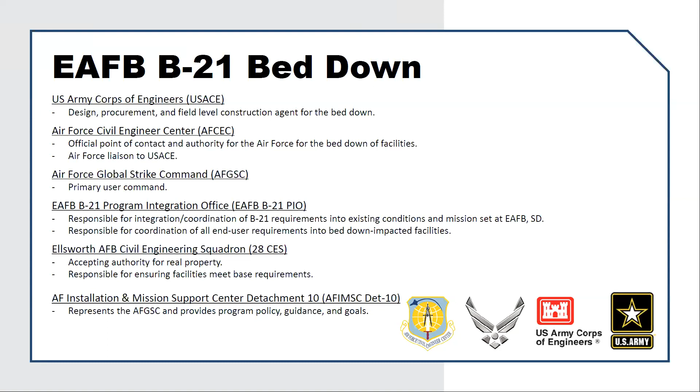We have Ellsworth Air Force Base Civil Engineering Squadron, who will be accepting the facilities and responsible for ensuring operations and maintenance facilities meet the operational needs. And then we also have Air Force Installation and Mission Support Center, DET 10, and they liaison between Global Strike and AFCEC and provide policy, guidance, and goals for the bed down.

I was asked to build on what the Army Corps of Engineers' role is, maybe answer the question why a bunch of people with Army behind their name are involved with the Air Force bed down. Ultimately, we are the design and construction agent for the Air Force for the bed down, and we're involved through the entire delivery of these projects, from planning through design and construction. We provide, on the government side, some continuity through all of those phases of project delivery.

We issue, negotiate, and award design contracts or task orders. In this case, a lot of these are going to be issued through existing indefinite delivery contracts. We'll talk about those a little bit more later. We typically award those to a prime AE that may utilize subcontractors. Similarly, on construction contracts, we award construction contracts to prime contractors only, and then those contractors may utilize subs.

Jason's with Walsh will be talking here in a few minutes. He'll probably dive in a little bit on what those needs are, but our focus is usually interacting with prime contractors. We have several offices within our district that are involved with the bed down. I sit in Omaha at our headquarters building. We have an area office, the Black Hills area office, which is in downtown Rapid City, and then we have a resident, local office at Ellsworth.

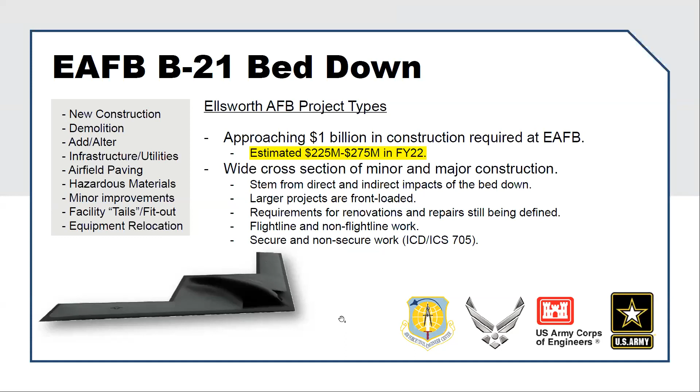So the larger projects in the bed down are front-loaded, with some of the O&M type and repair type projects trailing in the bed down. Last year, I think we were pretty vague on the bulk of the bed down occurring in the North Ramp area of Ellsworth Air Force Base.

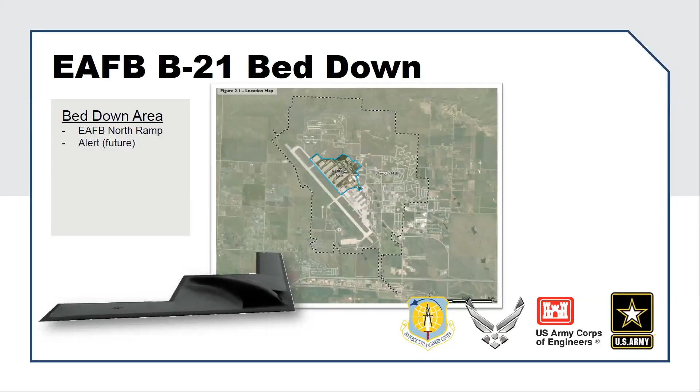That's kind of highlighted on this slide here. I'm not sure that we presented this, but this is a map of a good chunk of the projects that we're currently tracking. This is all obviously subject to change, but the facilities highlighted in yellow there are either a combination of new or renovated facilities that we're tracking.

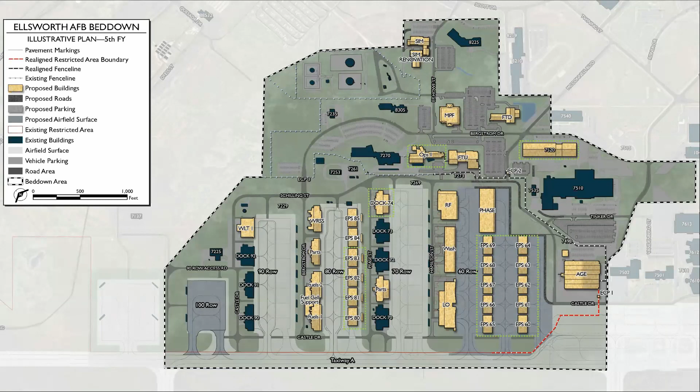So as far as unique features and common threads for design of these facilities, almost all of them are utilizing a design bid build delivery method. A lot of that's focused on the fact that we're designing facilities for a weapon system that's currently under development. There are also a lot of secure features associated with these facilities. And obviously, with it being a new aircraft bed down, there's airfield paving in the mix, along with utilities, infrastructure, and other types of work that we're targeting to deliver through the bed down.

As far as procurement goes, and this is mostly focused on construction contracts, we start as early as we possibly can to engage with industry on the best and most efficient ways to procure these projects. So about a year out from actually advertising a project, we'll begin a market research phase.

This has become a little bit repetitive, but ultimately we post all kinds of information on sam.gov regarding individual projects, so definitely keep tabs on that website. Typically a search with B-21 is a good start to see what's going on.

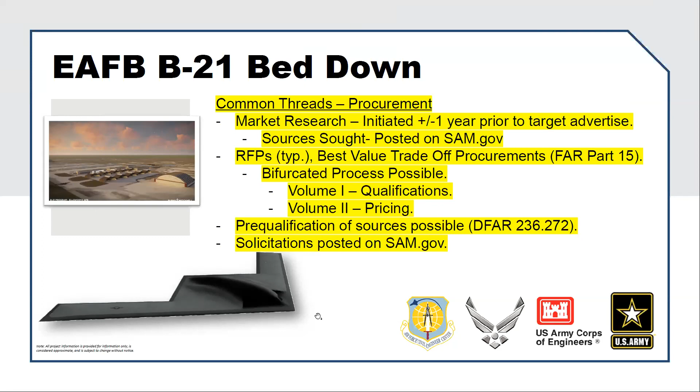And again, solicitations are always, or almost always, posted on sam.gov.

We have quite an array of projects under various stages of planning, design, and now starting into construction. Right now, we have FY22 through 24 projects under design, and we have 24 and 25 projects entering planning.

Last year we talked about various AE IDIQs that we're tracking. Ultimately, those have been awarded since then, so here's a list of the prime AEs on those IDIQs. Most of our B-21 work is targeting that B-21 IDIQ coming out of Kansas City District, but ultimately we tend to use all the tools we have at our disposal to deliver on the requirements for this bed down.

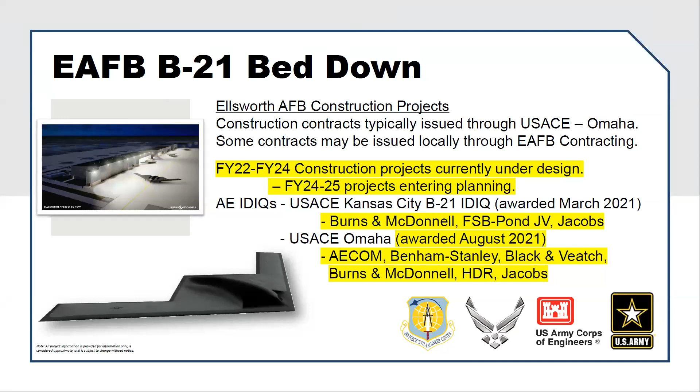Jason with Walsh is going to talk about the LO hangar, but that was our first major award for the Ellsworth bed down. It occurred in mid-September last year, so I'm not really going to dive in on that - I'll let him speak to that project.

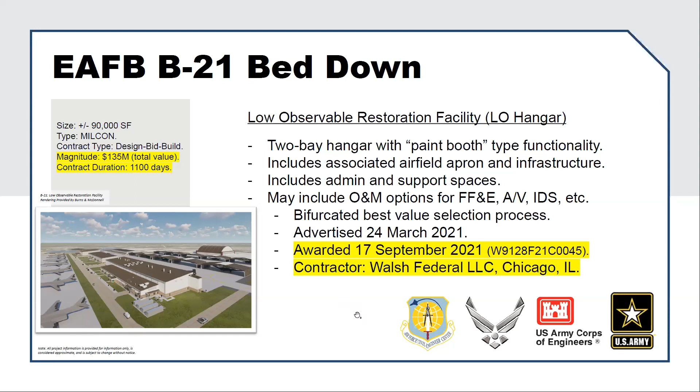It's a two-bay hangar facility. We also have several FY22 large MILCON projects that are advertised for pricing right now, and pricing is due very, very soon on a lot of these. I'm going to quickly gloss through some of these, but I've tried to provide updated information, contract and advertisement numbers where I can.

We have a wash rack and maintenance hangar, a two-bay hangar that actually sits right next to the LO hangar. We have a mission operations planning facility with a lot of security requirements attached to that. Pricing on this one is currently due in late January.

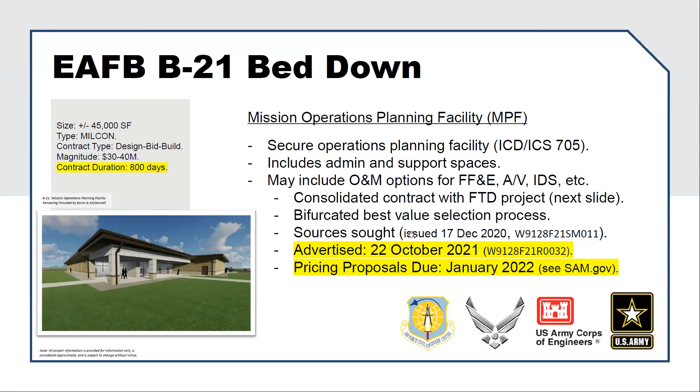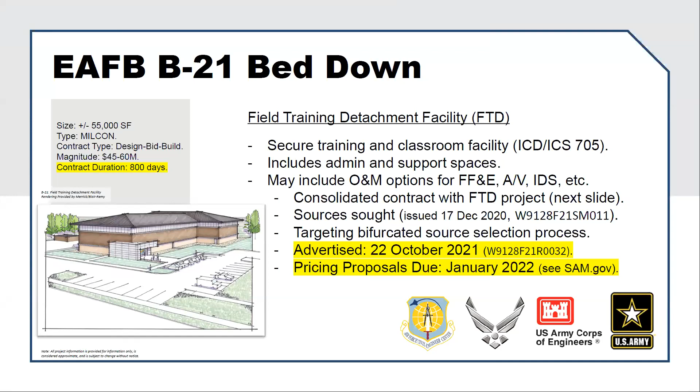We have a field training detachment facility that was initially advertised in October - I have a note here I actually didn't highlight, I should have - this is consolidated with the MPF facility in a single procurement. They sit on a shared site with very tight site constraints, so we've issued these two projects as a combined RFP.

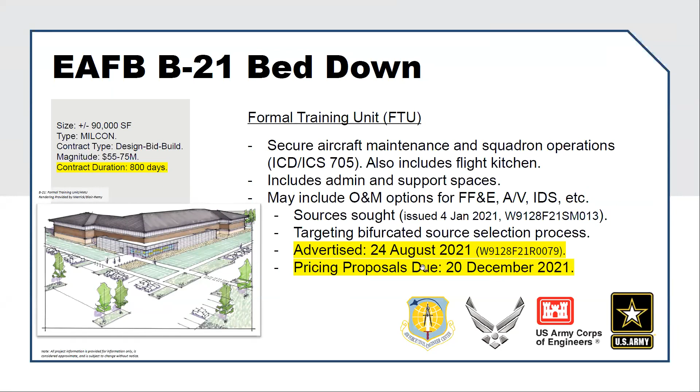We have a formal training unit and an AMU, aircraft maintenance unit, that was advertised, and pricing proposals were just due before the end of the year here. We also have an add/alter simulator facility with pricing due early next week.

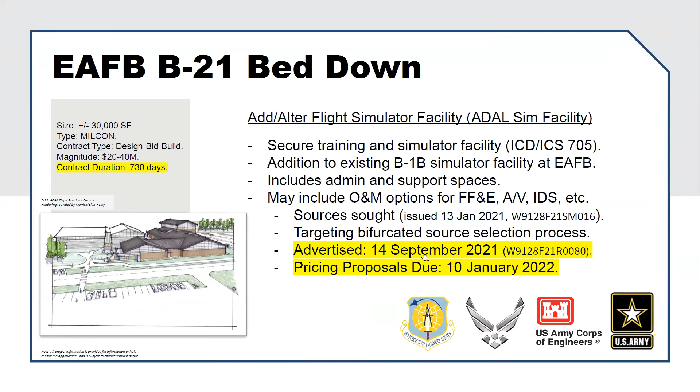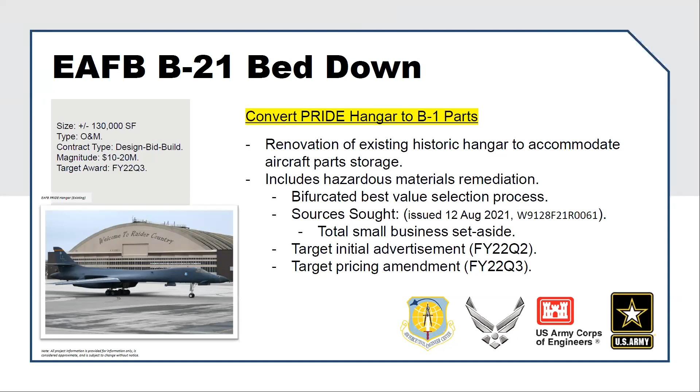A little bit more near term, but a few months out, we have a renovation of the historic Pride hangar at Ellsworth into a B-1 parts facility. We've issued a sources sought on that back in August, but ultimately we're looking to advertise that one in the second quarter, early third quarter.

We just issued a source sought for an FY23 project, a radio frequency facility. So we're definitely looking for industry feedback on that project. The source sought information is posted on the slide here. Ultimately, we're looking to award that one around the second quarter of FY23.

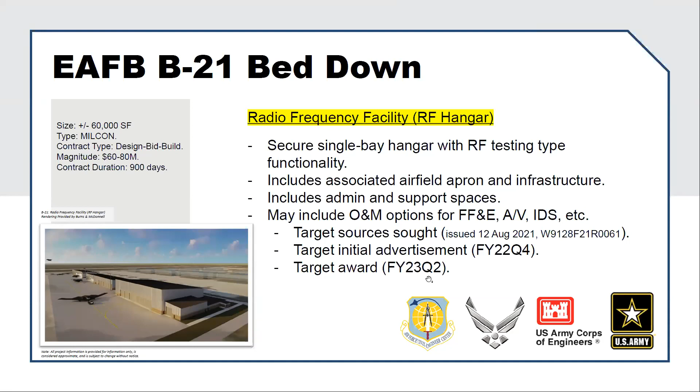We have a phase hangar, which is getting a little further out - an FY24 or so project. It's a two-bay hangar currently under design, and we're looking to target a construction contract award in FY24.

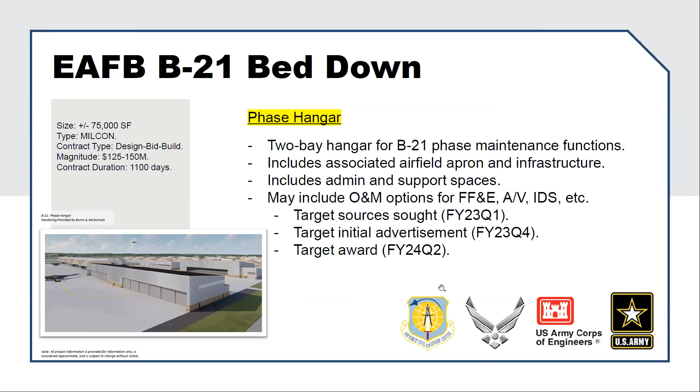Even further out than that, there's an abundance of opportunities. We have environmental protection shelters, some warehouses, renovations for different types of trainers and simulators, additional runway projects, and an alert facility. There's also, not technically called a B-21 project in the government's eyes, but obviously occurring at Ellsworth, a weapons generation facility, and a variety of other projects. Almost all of these would be issued through the Corps of Engineers, but there may be instances where the base has other smaller type projects that could be issued by the base.

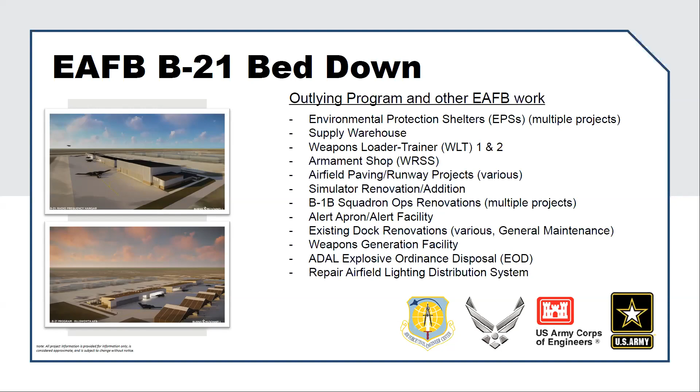Here's an image that shows a conceptual view of the North Ramp area. A lot of this work is new construction or renovations.

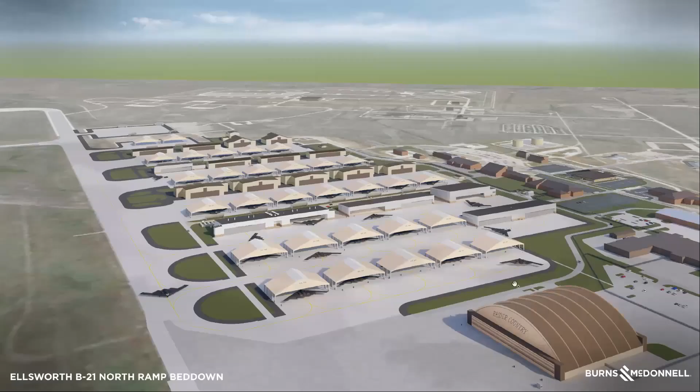I'm happy to answer any questions that I can. Naomi, or Charlie, did I miss anything that you think we should talk about? No, I think that was a great overview. Thank you.

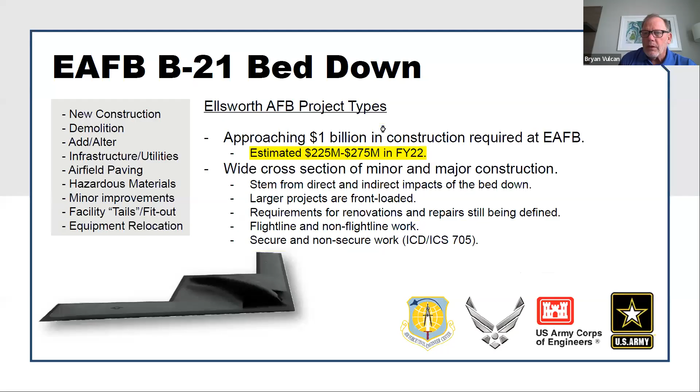One question, Andy - are we going to see the B-21 flying around this year? I think we can answer that, but thought it was interesting. I don't think the aircraft's going to get actually fielded at Ellsworth until 2025. Is that about right? I think we brief delivery on track for the mid-2020s. Yeah, okay, I'm certainly not the expert on that type of topic.

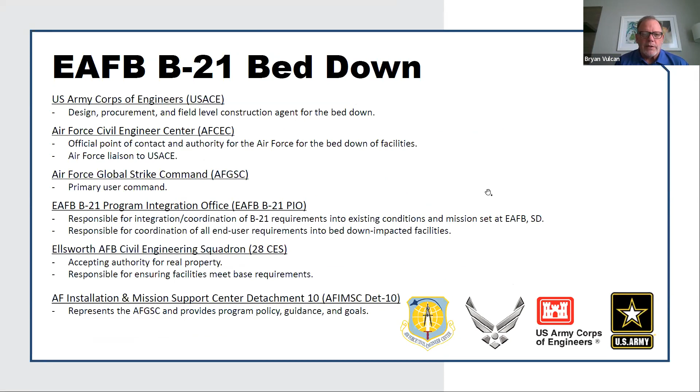Let's see, I want to make sure all the questions are answered here. They're coming in a couple different directions. Just give me a second. Okay, yeah, I think so.

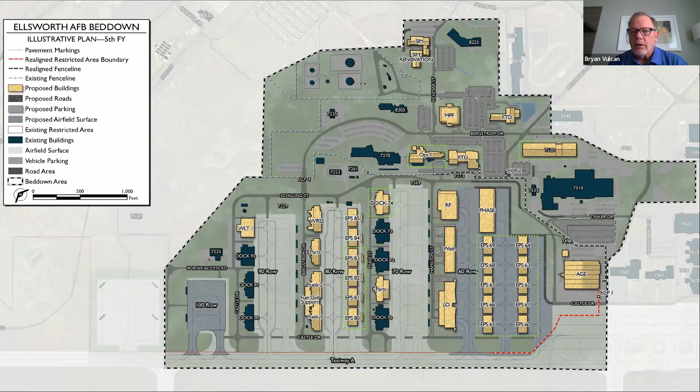I think we'll switch gears now, and I want to introduce Jason McDonald. Jason's with Walsh Construction. As we've mentioned a couple of times, they were awarded the first contract in this program, major contract in this program for construction. And they do have some needs, and we want to make sure they're able to tell folks, suppliers and contractors and other people in the region and community what they need to make their project successful. So Jason, if you want to come on and go ahead and share your slides.

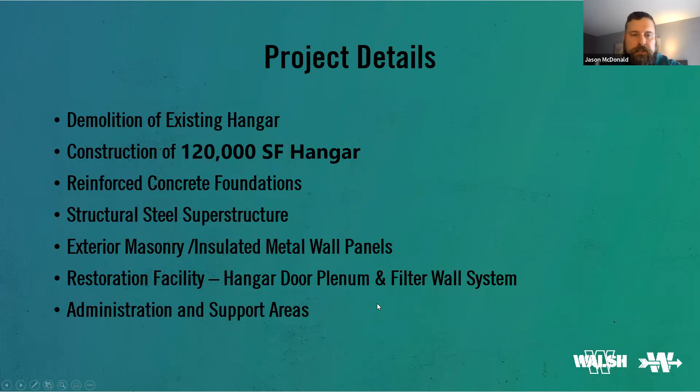The abatement and demolition we're looking at through Q1, Q2 of 2022, so this winter and spring. Foundations and structural steel, Q2 through Q4 of 2022. Then we'll start the skin and roof panels, that'll be Q4 22 through Q3 23. Interior concrete, Q2 and Q3 of 2023.

Then we'll transition into the finishes and mechanical build-outs, starting in Q3 of 23 through Q2 of 24. And then we'll go into a commissioning and training phase of the closeout, Q3 of 24.

Anticipated project needs: definitely small business. We want to make sure we're reaching out to the local community and getting participation from small businesses. It certainly helps to have local folks familiar with the area working with us and our teams on site.

Also, local staff and project labor are a huge help, especially if we're fortunate enough to land some of these other projects. It definitely makes a big difference on how we staff our projects if we can get local people in those positions.